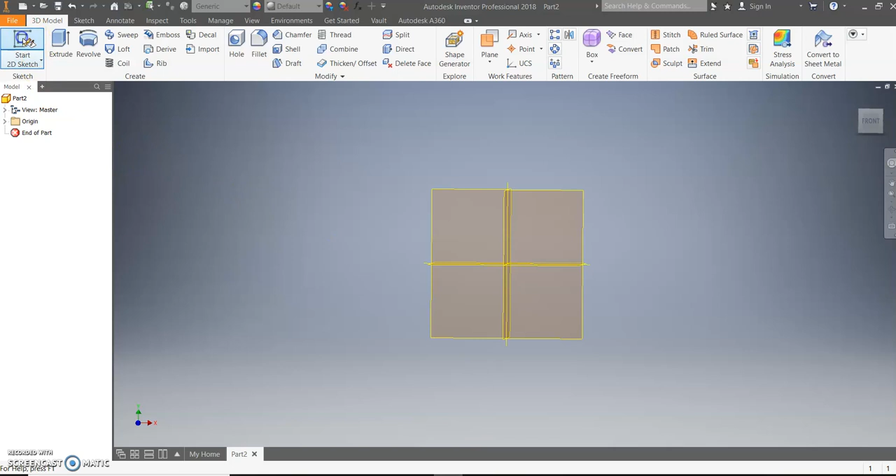So first we'll go to our Inventor part page. I'm going to start a 2D sketch and put it on my XY plane, starting with that overall rectangle. If we look back to our size, counting down, it's going to be 10 long by 5 high, and when we extrude, it's going to be 4 deep.

So to do that, we draw a rectangle, starting in our corner. I type in 10 for my length, hit tab, then 5 for my height, and enter. Once we do that, we can finish our sketch and extrude it. Again, we're going to extrude it out 4 this time, so hit 4 and then enter. Now zoom out, you can see our rectangular prism.

If we look closely, these triangular pieces on each side are not the same size. So I'm going to draw one side and then the other side, and then connect them using the loft tool. If I look on the front side, I can see it's 1 from both sides and 1 up from the middle or the bottom. So we can do that on the front side of our prism we just made.

So start a 2D sketch, we want to make a triangle. To do that, we can just use our line tool. I'm just going to roughly put it out there and dimension it afterwards, roughly doing my location of this object. It doesn't have to be perfect at this time, since we'll use our dimension tool to make sure it's in the right place.

So to dimension it, we want to make sure it's equal distance from each side, and we said that was a distance of 1. So I'm going to click on both points and type in a 1. Then I'm going to do the same thing on the other side. I could just use the equal tool, but since I already have the dimension tool, I'm just going to dimension it.

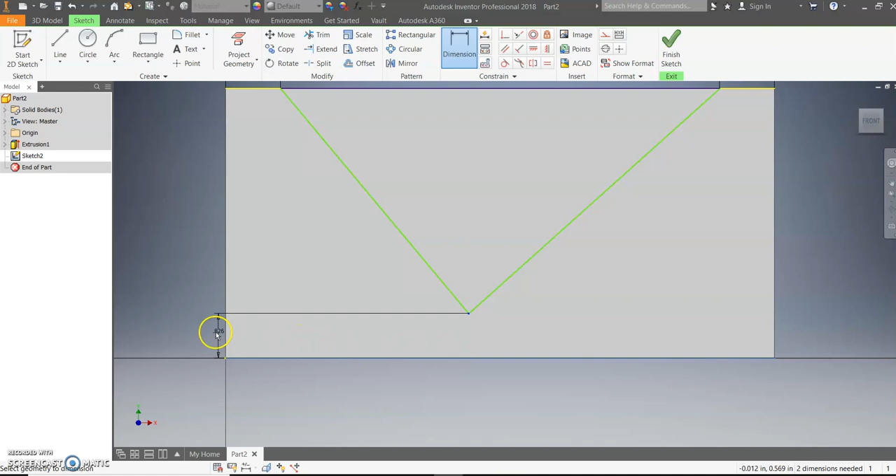1, and we also said it was 1 from the bottom as well. So I want to go down to the bottom point and make that 1 from the bottom. Click on the bottom, move outside my object, and type in a 1. Now it's not centered. A few ways we can center it. The way I'm going to do it is use the equal tool and make these 2 lines we just drew of equal distance, which centers that location. You can see we've been fully constrained, so now I can finish that sketch.

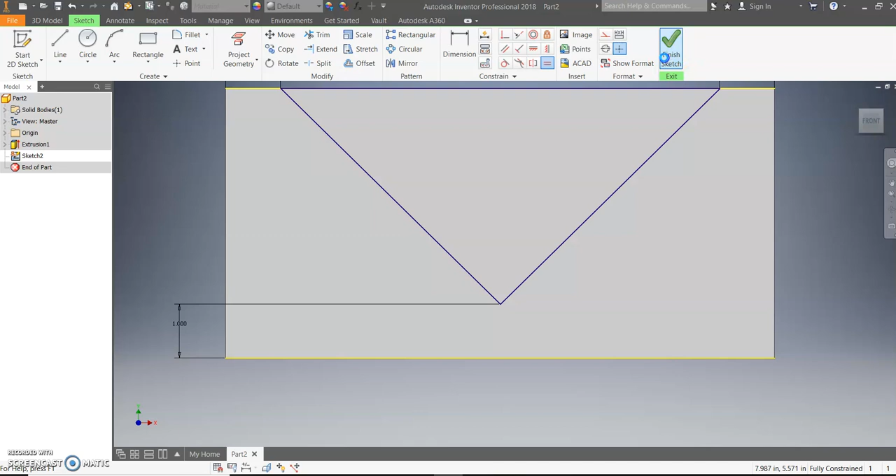Then I'm going to turn around to the back side and make my triangle that goes on the back side. If we come back here, we can see we have 1, 2, 3 from each side, and this time it goes down 2 from the top. So we have to do a slightly different triangle on this back side.

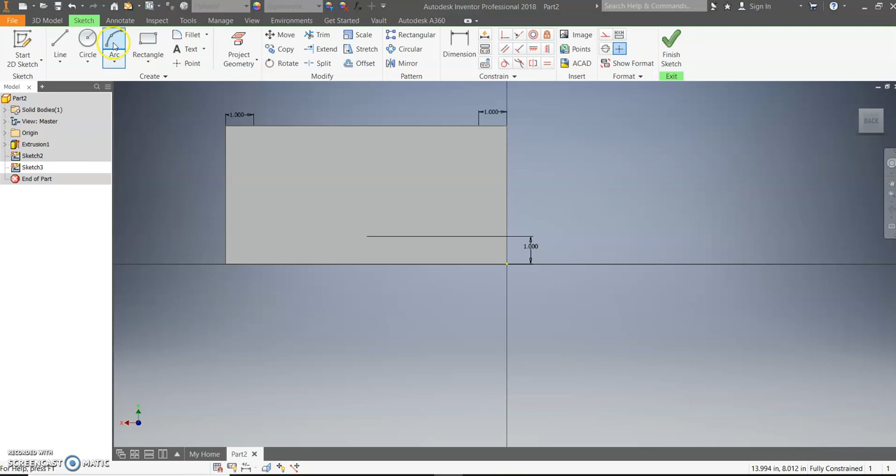Again, we start a 2D sketch. I'm just going to do a rough triangle back here, clicking on the top somewhere, as long as I'm on the line that's fine. I'm going to go down somewhere towards the center. This time I got it right, and you can see it makes a dotted line when you're in the center. You don't have to get that, but we will in this case. Then I go on top, and I've got to close out my shape by connecting those 2 dots.

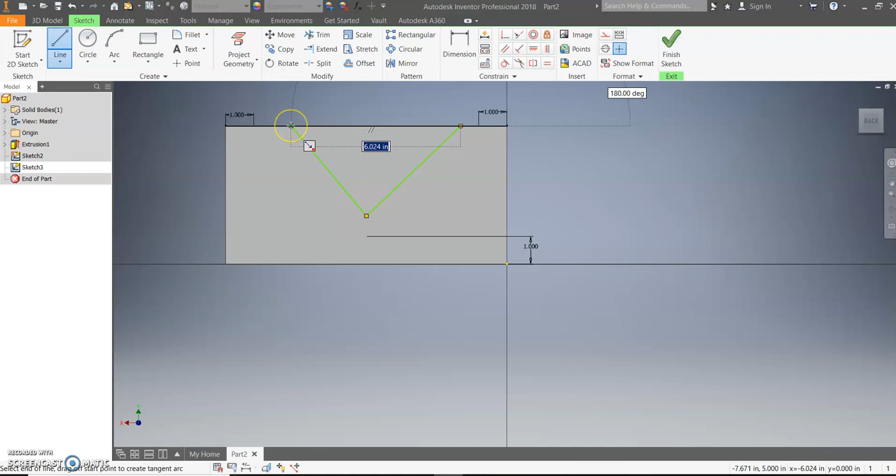Again, we're going to dimension, and I said each side, so I'm going to go from the corner of my triangle to the edge, which was 3. I'll type in a 3 and enter, then do the same thing on the opposite side - edge of my triangle to the edge of the shape is 3.

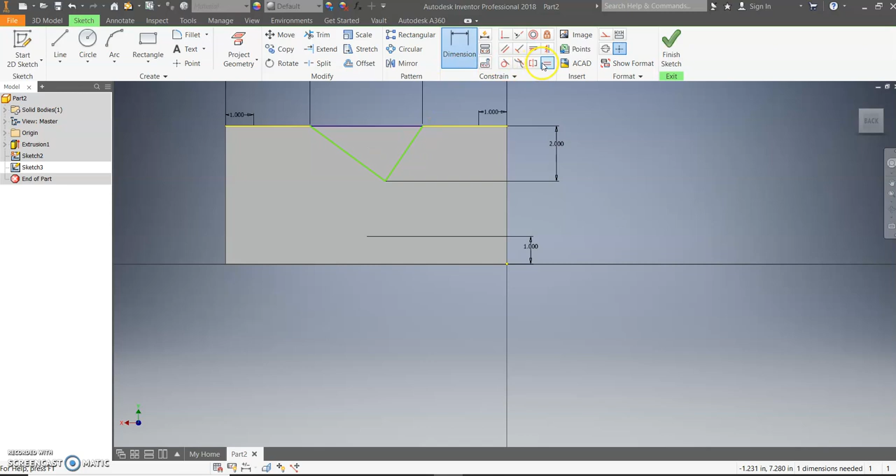And then I said from the base or this top to the center point is 2, so I need to extend that out and type in a 2. Lastly, I want to make sure those lines are equal length to center that location and make a nice isosceles triangle. So I'm going to go point, line, then line, and that centers and fully constrains my object. Then I'm going to click Finish Sketch.

Now that I have the sketch finished, I've got 2 shapes, 1 on each side. I can loft between those. So I'm lofting between these shapes - again, it's a loft cut. I want to make sure to click each one of these triangles.

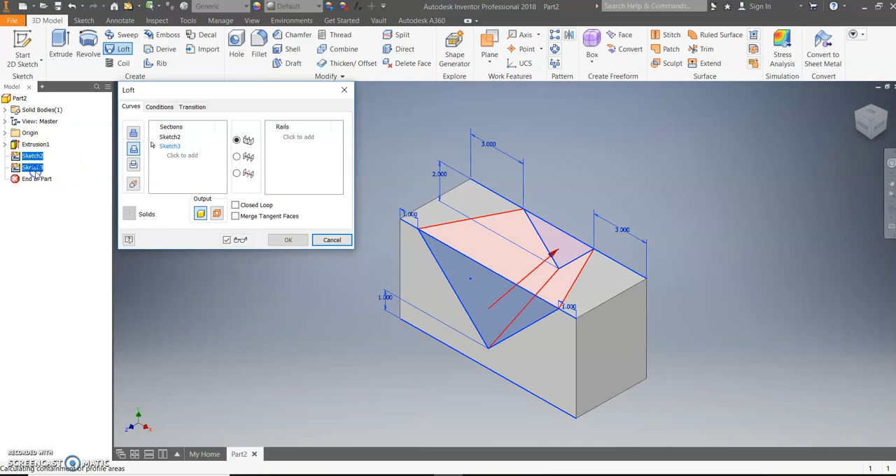An easy way to do that, making sure you're not accidentally clicking the overall square or rectangle you have going on, is just to select the sketch. So I'm going to select sketch 2, then select sketch 3, and that lets me cut between those, you can see. So I hit OK, and you can see it's created that cutout there in the middle.

So hopefully this helps you create your ISO number 7. Again, we use the loft tool to help us create that cutout there in the center. Good luck in your creation.